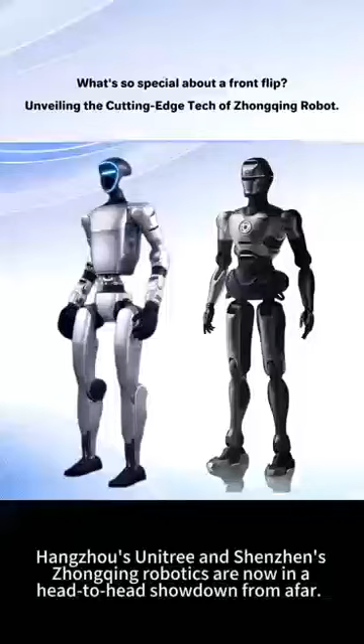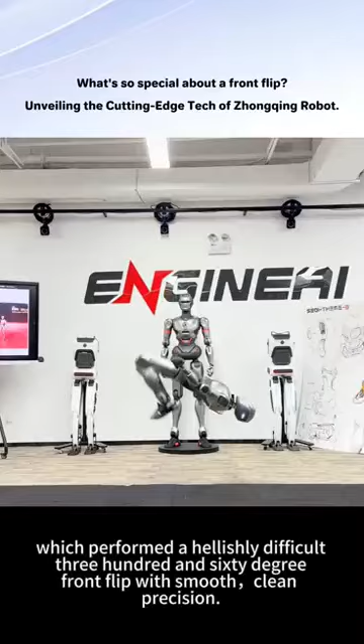Hangzhou's Unitree and Shenzhen's Zhongqing Robotics are now in a head-to-head showdown from afar. Unitree has fielded its Kung Fu bodyguard, executing a set of boxing moves with fluid grace. Shenzhen's contender is the Zhongqing robot, which performed a hellishly difficult 360 degree front flip with smooth, clean precision.

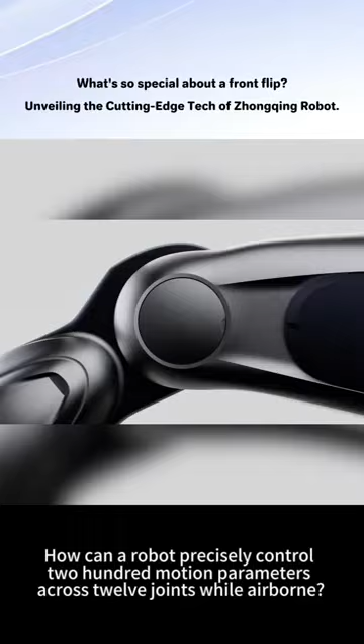Backflips were achieved long ago, so why is this front flip setting the market abuzz? Today, let's talk about what exactly makes a front flip so challenging for robots. Let's start with the core question: how can a robot precisely control 200 motion parameters across 12 joints while airborne?

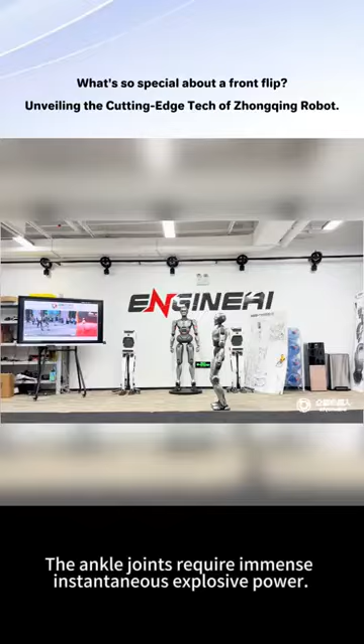This involves several monumental difficulties not present in a backflip. Visual blind spots make it impossible to assess the landing environment. The forward shift in the center of gravity during a front flip makes a fall more likely. The ankle joints require immense instantaneous explosive power. The landing must be stable enough. A single front flip consumes 45% more energy than a backflip.

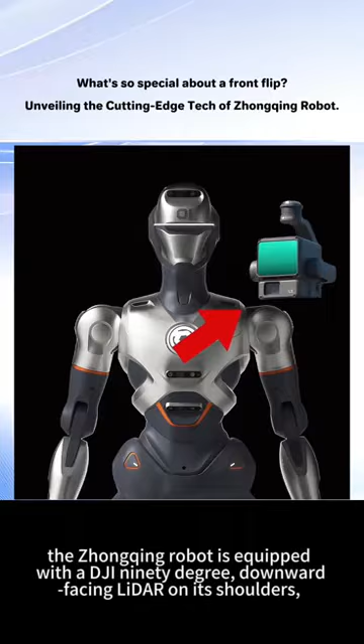So how did Zhongqing's engineers solve these problems? First, to tackle visual blind spots, the Zhongqing robot is equipped with a DJI 90 degree downward-facing LiDAR on its shoulders, paired with a Huawei 5G module. This enables scanning ground protrusions in just 4 milliseconds, 15 times faster than human vision.

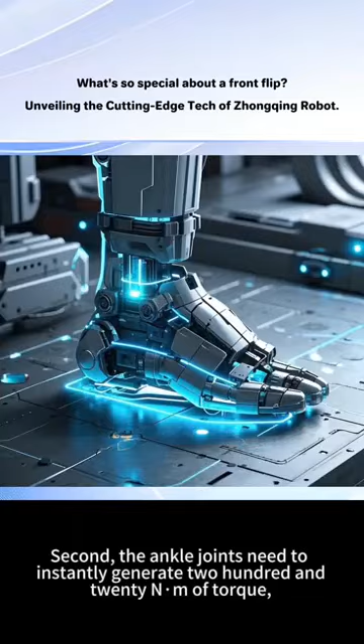Second, the ankle joints need to instantly generate 220 newton-meters of torque, equivalent to lifting 2 motorcycles simultaneously. In this regard, the carbon fiber components co-developed by Zhongqing and AVIC, Aviation Industry Corporation of China, possess strength on par with military helicopter rotor blades, yet are 60% lighter than traditional metals.

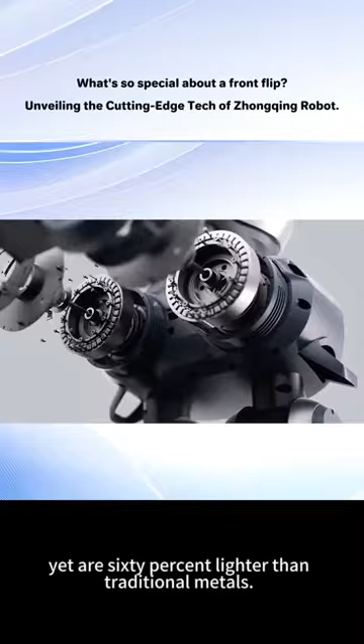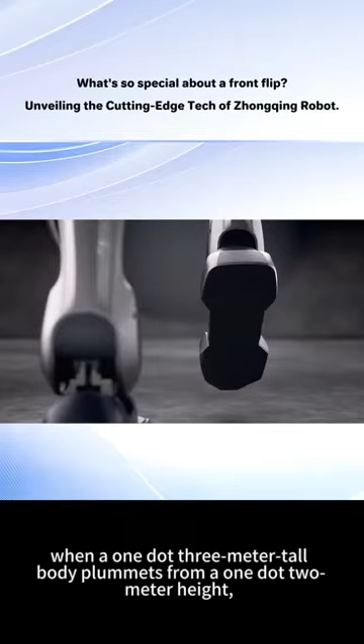Coupled with Bosch's magnetorheological actuators, the joints can deliver peak torque within 0.03 seconds, transforming every leap into an elegant arc that defies gravity. Regarding landing control, when a 1.3-meter tall body plummets from a 1.2-meter height, the force difference between the toes and heels must be kept within 5%. That's akin to demanding someone jump from a second-story building in high heels and land steadily, a seemingly impossible requirement.

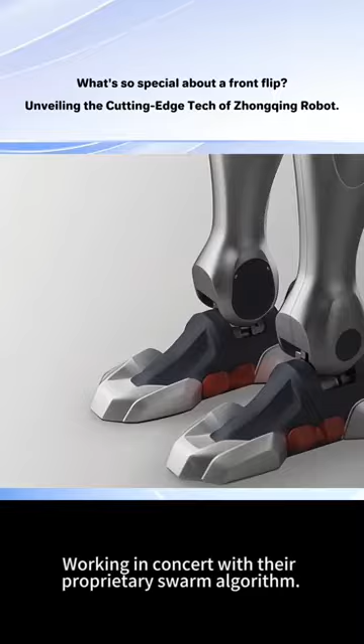Zhongqing's bionic hydraulic ankles are embedded with 32 pressure sensors. Working in concert with their proprietary swarm algorithm, they can perform 300 dynamic adjustments the instant they touch the ground. The simulation is so lifelike that a prosthetics company has even used this technology to allow users to regain the sensation of feeling grains of sand.

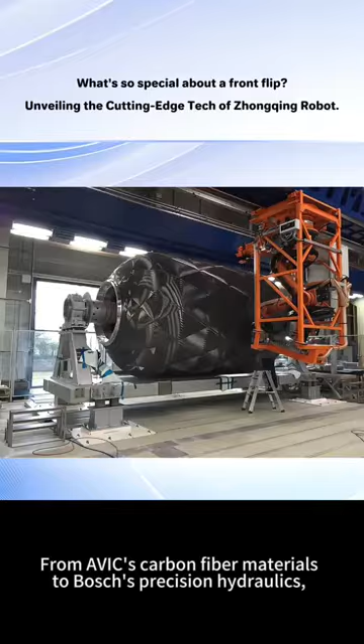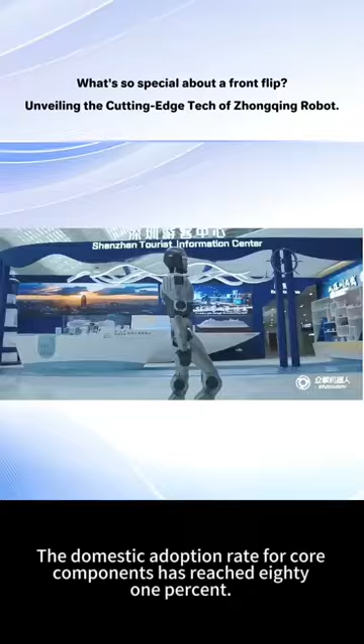From AVIC's carbon fiber materials to Bosch's precision hydraulics, from DJI's LiDAR to CATL's Ningde solid-state high-density batteries, this seemingly simple front flip has driven technological upgrades across 12 industrial chains. The domestic adoption rate for core components has reached 81%.

But if you think the front flip is purely a technological flex, you're underestimating its greater mission. The founder of Zhongqing has said, "Our robots are not porcelain dolls in a laboratory, they are warriors rolling through fire." Amid the flames of a chemical plant explosion, a Zhongqing robot performed a front flip over tilted hazardous chemical pipes and used its robotic arm to close a valve inaccessible to humans.

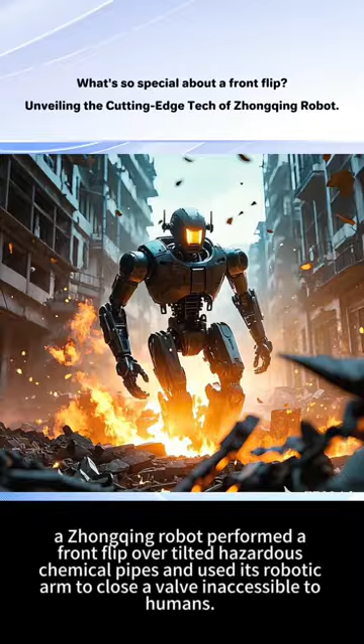On the embankments during the Yangtze River flood season, they continuously jumped to inspect 20 kilometers of critical sections. In the 2024 Shenzhen Mountain Fire Rescue, they executed 8 consecutive front flips to cross an 8-meter-wide cliff, leaving safety to the human firefighters. While other robots paint visions of entertainment and domestic bliss, Zhongqing has chosen a perilous technical path, charging ahead in industry and rescue operations.

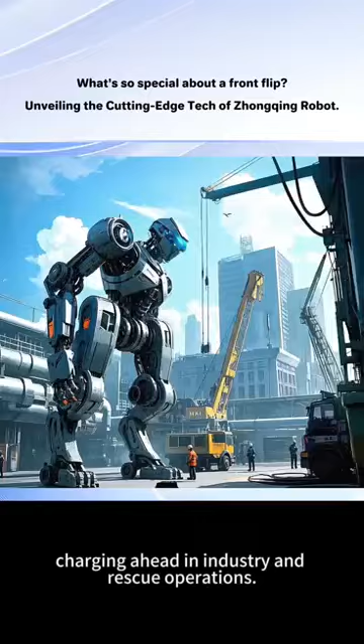As they tumble and leap through ruins and flames, humanity's understanding of the preciousness of life is also elevated. For us, rather than comparing which child is superior, we should be grateful to have both Unitree and Zhongqing Robotics as twin pillars of excellence.